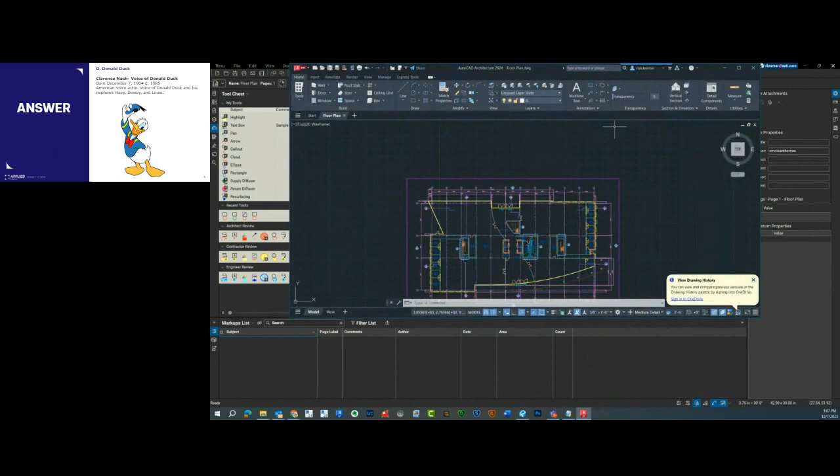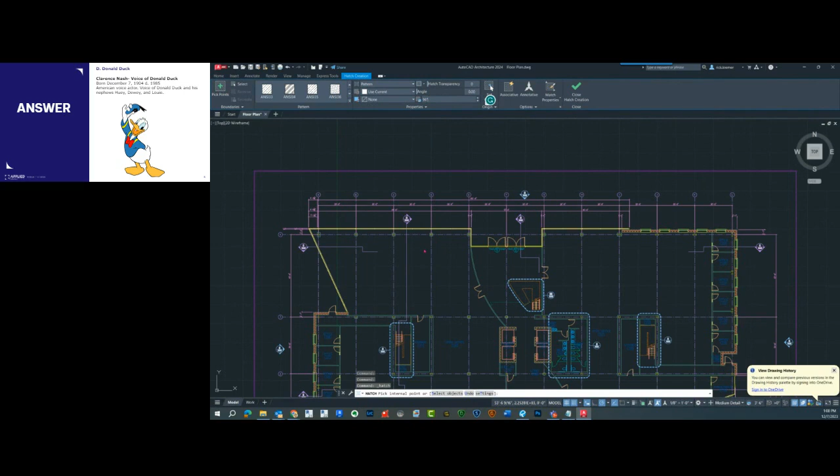To start off with PAT files, let's go old school and open up AutoCAD. I had to brush off the dust off this software because I'm a Revit user as well as a Bluebeam user, but I came from AutoCAD, and in AutoCAD you have what's called hatch patterns. AutoCAD architecture ships with all these different types of hatch patterns, which you can install or set up here in this environment. So all I'd have to do to put in a hatch pattern is put it in right here, and it finds the information, and I'm done.

So over here is this hatch pattern, wrong scale, but you get the idea. Users were requesting Bluebeam be able to bring in hatch patterns into Bluebeam.

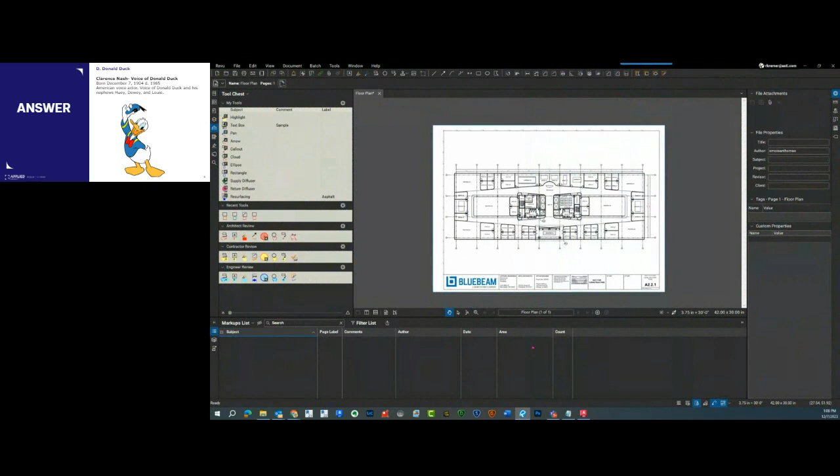So what I want to do is show you 3 different methods. You guys are going to love this. 3 different methods on bringing in and creating hatch patterns in Bluebeam Revu.

You might know that you can create hatch patterns here in Bluebeam. If you've never seen that, all you have to do is open up a closed shape, like a rectangle, circle, or polygon. I'm just going to do a quick test off in the top area, and when you place this object, up in the top properties bar you have an area called hatch.

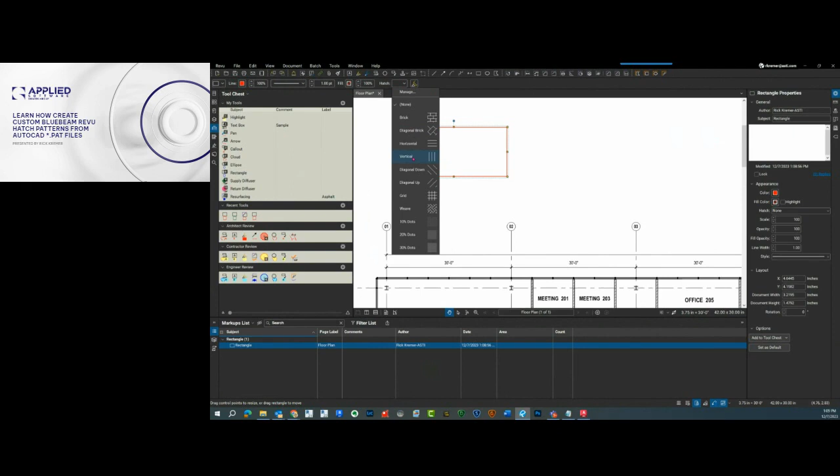Good, bad, or indifferent, the hatch patterns are there for your use. I personally don't like them because I think they clutter the drawing too much. I don't know what you all think. But if I wanted to fill this with a pattern, built into Bluebeam are these hatch patterns, which are really neat. So if I wanted to give this a brick pattern, all I have to do is select it, and voila, I get a brick pattern.

You'll tend to find that the patterns that come in here are too large of a scale. In that case, all I have to do is open up the properties toolbar on the right-hand side. I always like having my properties on the right, I don't know about you all. There's a reason for it, and if you're interested I'll tell you why. I always move my properties to the right-hand side.

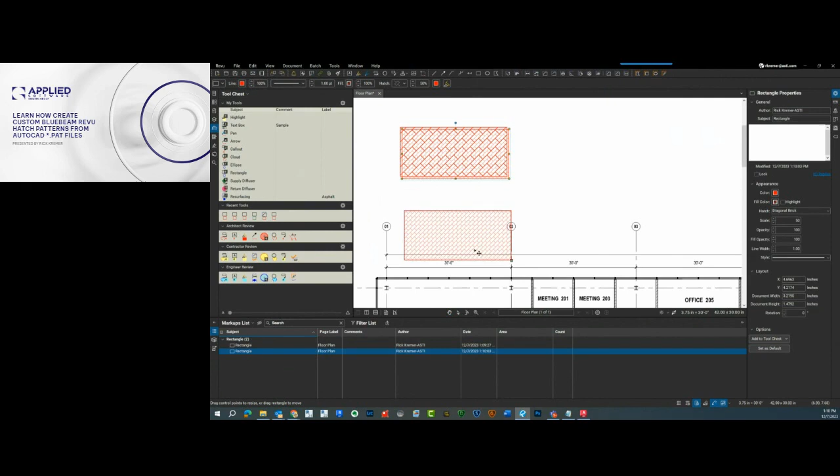If I wanted to change the scale of this, all I have to do is open up the properties panel on the right-hand side and change the scale. By changing the scale, I can make it smaller so it fits in this area. So here's the original, and here is the scaled down version.

So how do we start to go through and place these hatch boundaries? Well, easy. First, we can draw it with a polyline, or one of my favorite ways is using dynamic fill. For those of you who don't know about dynamic fill, this is going to be a great lesson. If you have an area like this open office area, and we wanted to place an area calculation to get the area calculation and also put a hatch pattern, I could draw it manually by going over to Tools, Measure, Area, and click and click and click, but that's old school.

If you have the new Bluebeam subscription 21 and you're on the complete edition, or if you're on Bluebeam Revu 20 and using the extreme edition, you have something called dynamic fill. Oh, are you ready for this? Dynamic fill, I hope you're sitting down. I'm going to use the shortcut key, the letter J, for dynamic fill.

It comes up with this floating dialog box, which allows us to use a paint bucket to really kind of paint by numbers in an area. What it'll do is go through and fill an area with a temporary hold, let's say a goo of space. You can also define boundaries. So for example, when I start to fill in this area, it's going to fill in over here because there's no lines for the doors.

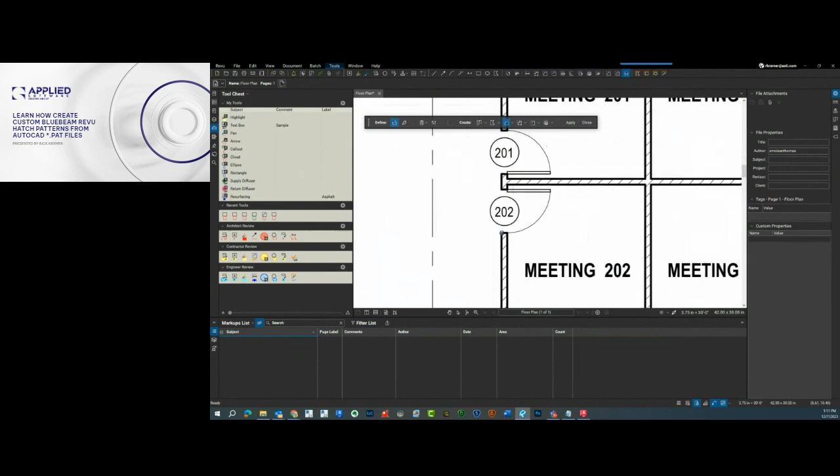So I'm going to start by putting a boundary, and this prevents the goo, in this case the Bluebeam goo, from going into these meeting rooms. I overshot it, and that's fine because this is just a temporary threshold. Think of it like you're pouring paint or concrete, you need a boundary for that concrete to rest against. What we're going to do is pour paint, and it even looks like a paint bucket.

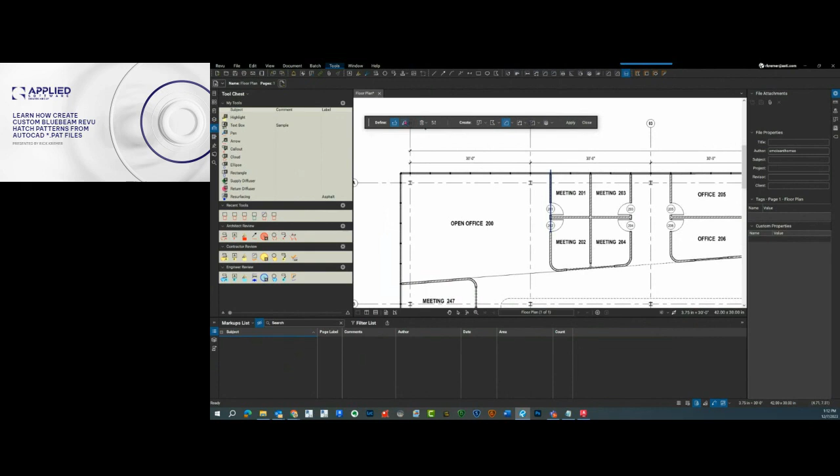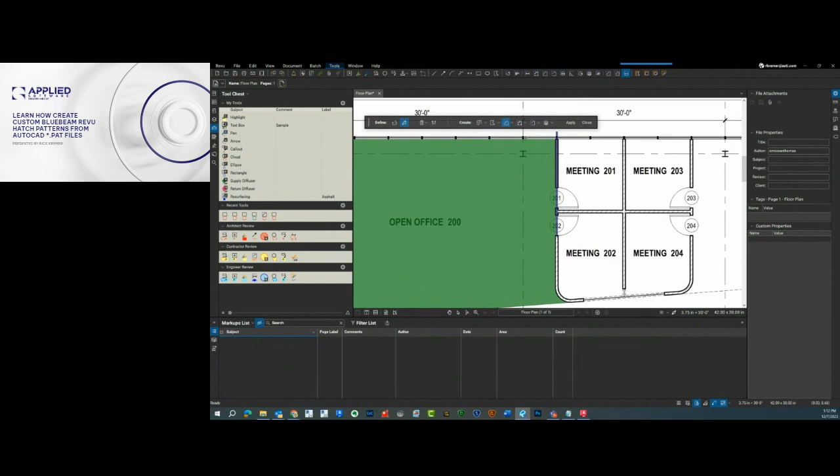I'm going to simply left click and hold - this is the adult paint by numbers. Boom, and I'm done. Over here, I'll fill in this area, and then I can create different things, like spaces and polylines. In this case, I'm just going to create a default area, selecting default, and click apply and close. So there it is, and now I have the space over here that's 944 square feet.

But let's say I want to fill it in with a hatch pattern. Simply select it, and I can go to the top properties toolbar or the properties panel on the right hand side, my favorite, and apply a hatch boundary. So I'll come over here and apply this weave, and there it is. I can try to change the scale of that, and I'm off to the races. I can even change the color

and make it blue - fill color blue. So how do I start to go through here and make this unique? Let's delete that and start over.

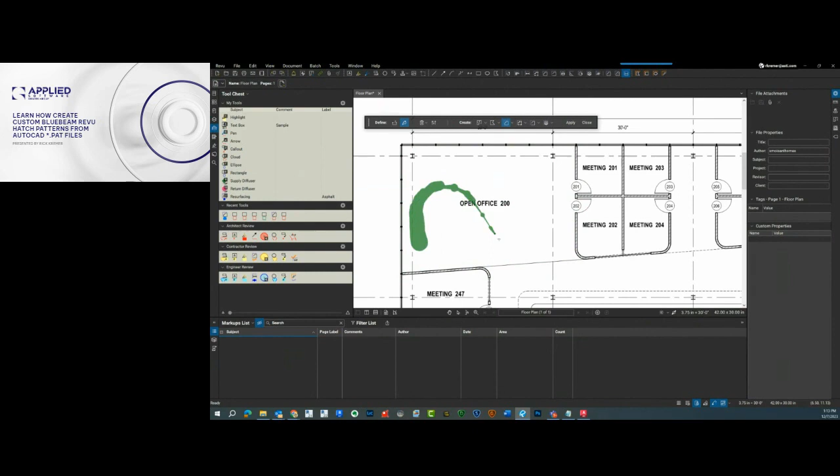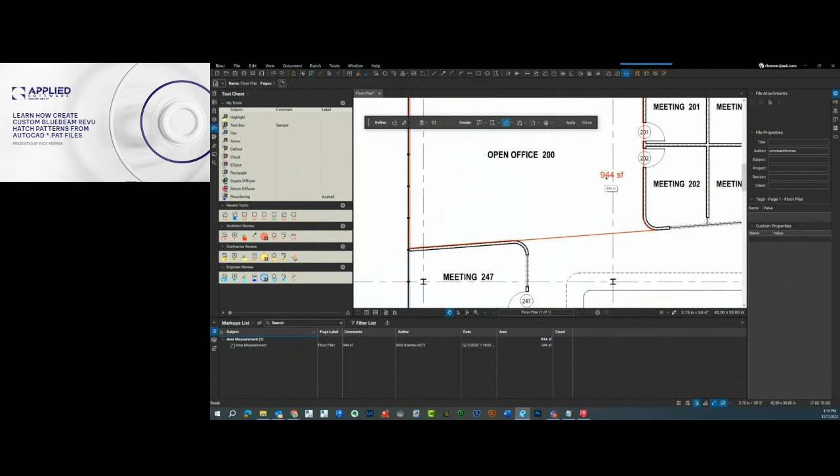If I wanted to create a new hatch boundary, I have the ability built into Bluebeam Revu, an easy way of creating a hatch boundary. First, let's start again by filling in this space with a generic area. This time I'm not going to put a boundary, and you'll see what happens - it fills in this right here. So I'll go back and cut it off with a boundary. In the next few steps, I'm going to show you how to create a hatch pattern from scratch, and I've got other ways up my sleeve as well. All right, so I'm going to move this over here and close.

When creating a hatch pattern, again, we have these built-in hatch patterns under hatch, but I'm going to show you where we're going to start to create some new ones. To do that, I'm going to go over here to manage, and this is where Bluebeam stores all of its hatch patterns. The PAT file I referred to at the very beginning of the webinar refers to an AutoCAD PAT file, and I'll show you where we're going to get those. But let's start off by first looking at the ones that are existing, then we're going to look at creating them, and then I'm going to show you how to use AutoCAD hatch patterns.

First, we need to create a pattern set. Out of the box is the standard set. Let's create a new set - that set is going to be our group of hatch patterns that we're either going to create from scratch or import from AutoCAD. So I'm going to click Add and give this a new set name. I'm going to call this Rick's Custom Patterns - let's call them Rick's Custom Hatches. And I'm going to go ahead and hit OK.

By the way, this is now a set, and over here is going to be a list of all the different patterns that I can create. I'm going to start by creating a new one over here by clicking the plus sign. Over here, this is the name, and we're going to have a list of all the different patterns that we're going to create. I'm just going to make up a name - I'm going to call this steel pattern, and give it my initials so I know it's mine in case there's another one out there. And when I do that and create one from scratch, I have a preview window of creating a new hatch pattern. Now, this is really, really fun and easy.

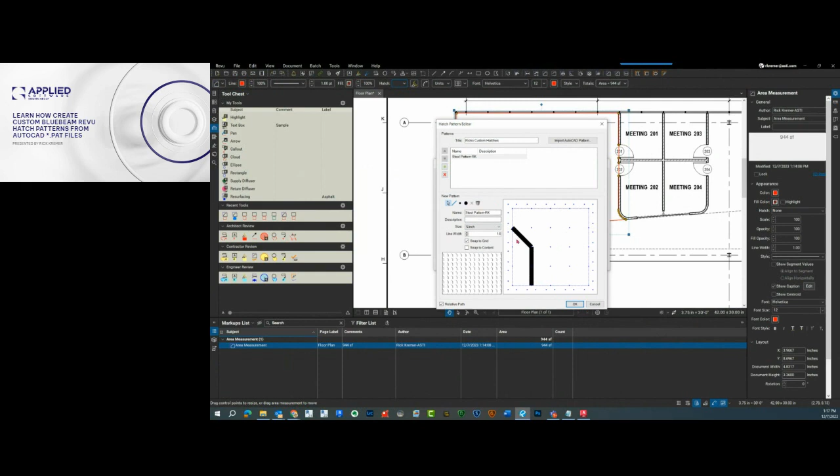So let's say this is perfect. You can see how simple this little line is, and now this is a steel pattern. I'm going to go ahead and see how this works in real time. I'll hit OK. And now I've created a set with just one new custom hatch pattern.

To apply that custom hatch pattern, all I have to do is select the area I just created, and either go to the top properties or, my favorite, over here on the right-hand side to the tool palette, and go over to hatch patterns. Here's my custom hatches. Notice the standard set is over here, and my custom hatches are now grouped down below. I'll go ahead and select that.

And there it is. If I want to change the scale of this, all I have to do is simply change the scale, which I typically do, and make it usually 50%. If I want to change the color, I simply come over here and change its color.

And that's the color of the outline. To change the color of the fill, I'll change it right over here. Now you might be wondering, how do I go ahead and start to create some other ones?

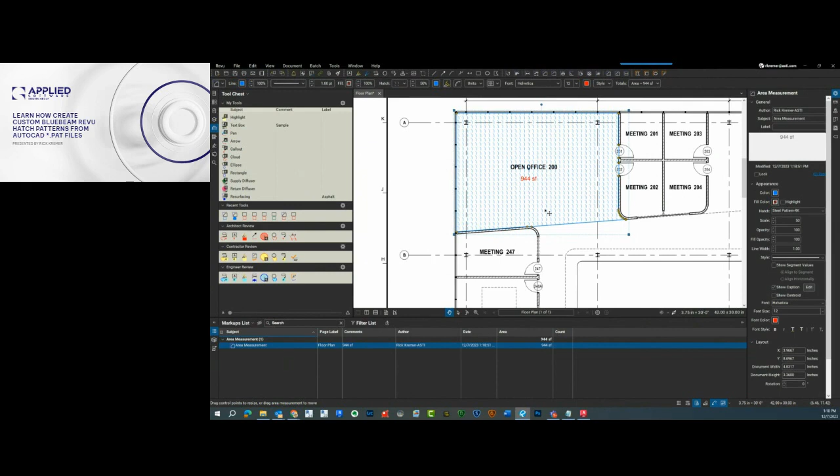Let's see how we can do that. Let's create another filled area. In this case, I'm going to create a filled area right here, again using dynamic fill. I love dynamic fill. And again, using a temporary boundary, I'm simply going to click from here to here, and this creates this threshold.

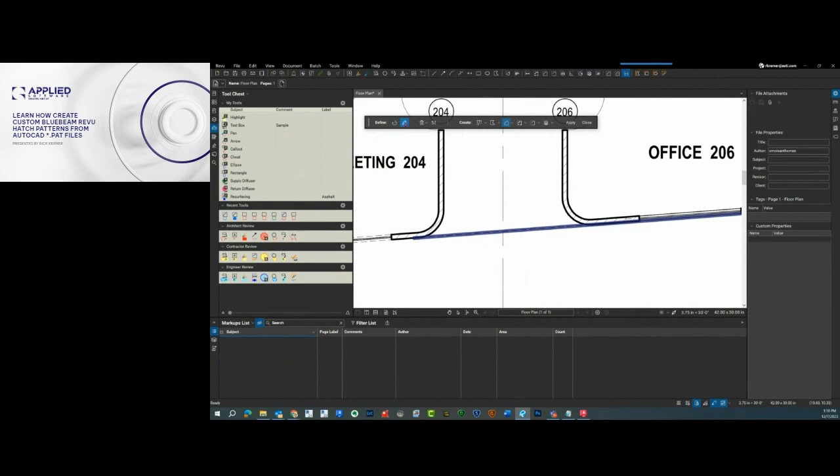You might be wondering, why did I do that? You notice those dashed lines - if I were to pour paint, they'll actually go right through those dashed lines. So I'll come over here and add some more thresholds from here to here, and from here to here. Again, overshooting isn't an issue because these are temporary and they'll just disappear when I'm done.

And I'll go ahead and add my temporary fill.

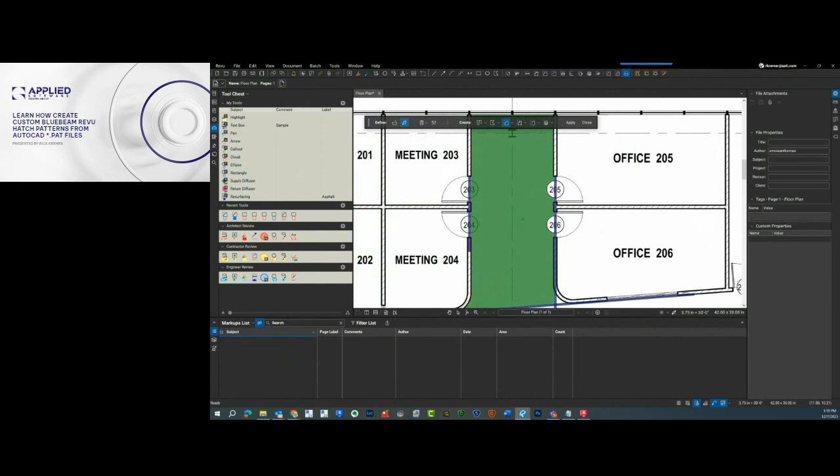Did you know you could paint by numbers over here, Misty, using dynamic fill? I did not know, but that's pretty awesome. Isn't it? I gotta say, yeah, it's fun for the whole family. So if you're ever wondering what to do on a weekend with the kids, just go ahead, load up Bluebeam and paint by numbers using dynamic fill.

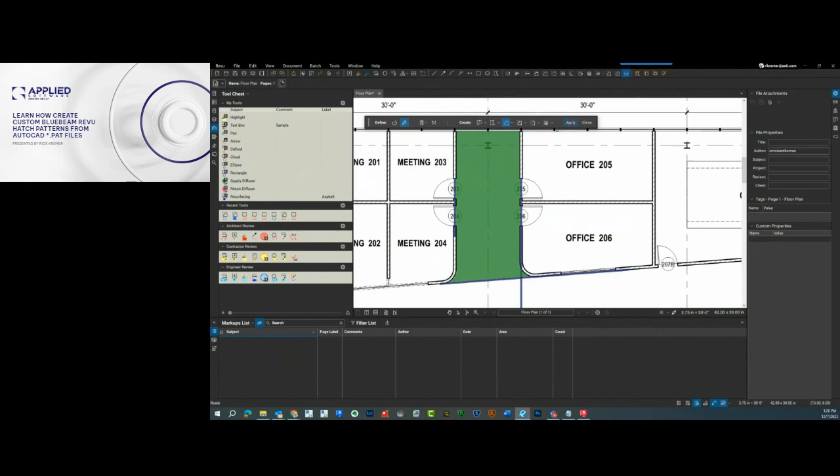All right, over here, I'm going to go ahead and apply and close. So on this one over here, I'm going to apply a new hatch. Again, go to manage - I'm going to open up my set.

And over here, click modify, not add, but modify. So when I do that, I'm going to add another drawing. In this case, instead of creating one from scratch, let's see what kind of other patterns we can create.

I'm going to create another custom one, and let's give it square boxes - square tiny boxes. I don't know what they are, but whatever they are, they're square tiny boxes. In this case, I'll come over here and simply draw something from here to here to here to here. And there, we can see that we got these tiny little boxes, right? I mean, how easy is that?

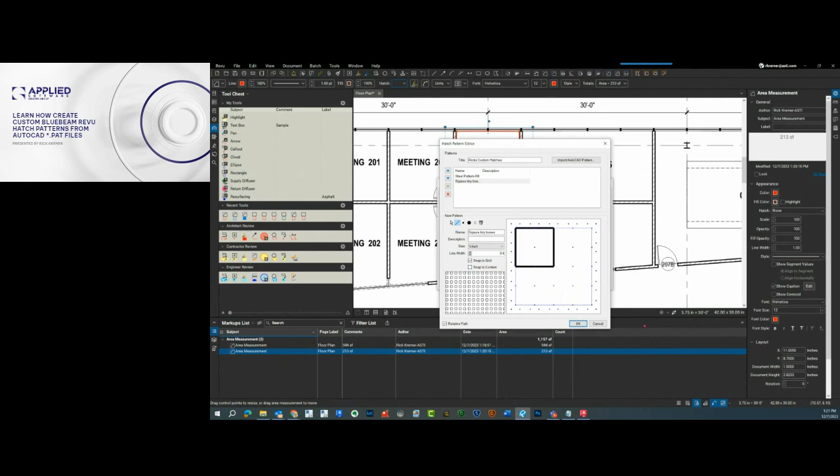If you've ever tried creating a hatch pattern in AutoCAD using Hatch 22 add-in or any of the other ones, including some from PyRevit, you don't get immediate results. You don't really see them, but here you really do. We can even adjust the line width to make it thinner, which is usually something I like to do. I'll go ahead and hit OK.

Again, add that hatch boundary here, and over here are tiny new boxes. What's interesting is in this drop-down menu, you don't see the different sets versus if we do the same exercise on the right-hand side going to hatch, we can see the standard and then my custom hatches.

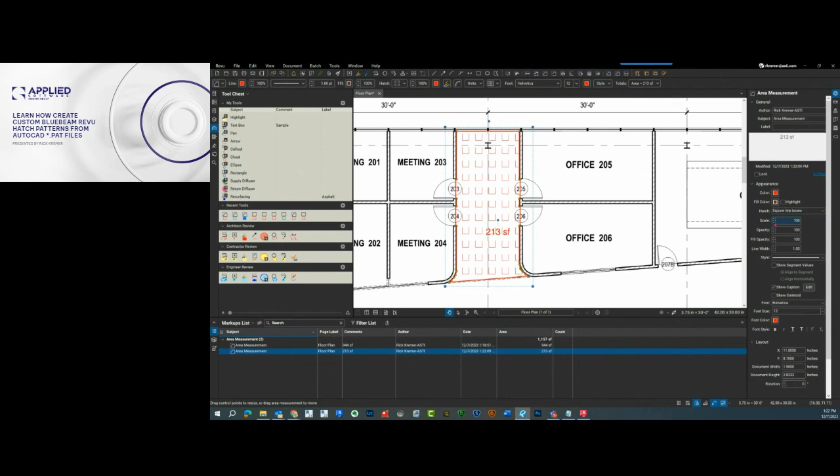Again, change the scale and bring it down. Easy peasy. Let me go ahead and minimize this. I'm not talking about tool sets today.

All right, how do we do AutoCAD hatch patterns? Remember, we had all of these AutoCAD hatch patterns. If you have AutoCAD or AutoCAD Architecture installed on your computer, guess what? You have these hatch patterns for free. What we're going to do is first locate them.

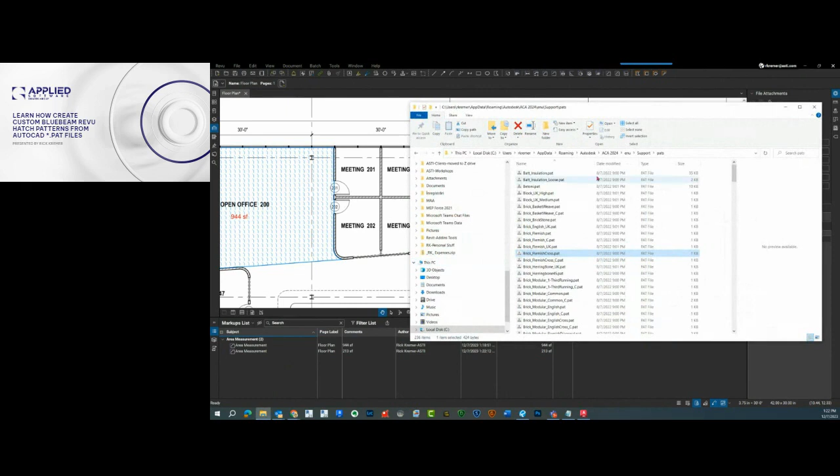I've already done that for you, and I have a couple of slides afterwards with resources so you can see where these are. I have AutoCAD Architecture 2024 installed on my computer, and I have, in this case, 236 free hatch patterns included. They're right here under App Data, Roaming, Autodesk, ACA 2024. If you have earlier versions of AutoCAD or AutoCAD Architecture, just look for that year, and you should find it under ENU, Support, and then PATs.

These are the PAT files. If we take a look at what exactly is a PAT file, we can open it up with Notepad, and that is what that hatch pattern is. It's actually something that can be created manually.

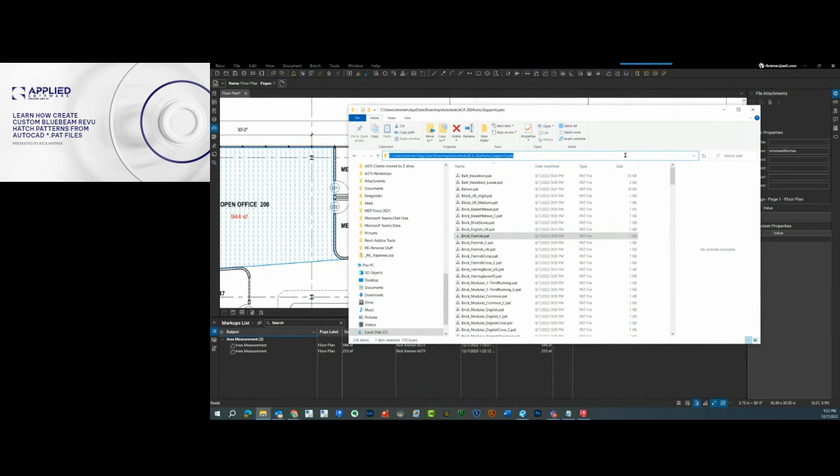No one would ever do this, maybe way back when, but this gives all the information for that line to start at a certain distance and go a certain length and a certain angle. But we're going to do that automatically. So what I'm going to do is just copy where this location is to my clipboard, and I'll show how we're going to create these hatch patterns from scratch.

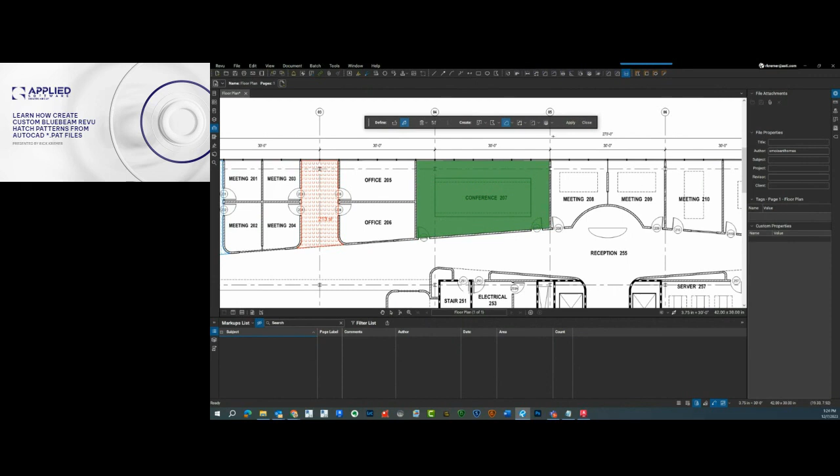Let's add another one over here. I'm going to add another dynamic fill pattern right here. As you can see, I love dynamic fill, it is just so easy to use. I'll go ahead and apply and close, select it, then go over to my hatch patterns, go to manage, select this, click modify, and we're going to add another one.

But this time, instead of adding one from scratch, we're going to import the AutoCAD hatch pattern. When I click here, I have to find where that is. Remember my earlier step, I went through and copied to clipboard where that location was. Now over here in file name, Control V and hit open. It takes me right to where these hatch patterns are. If I want to use one of these, just simply click on it.

Now, unfortunately, you can only click on one at a time. I wish we could add them all at once, but you can't. I'll add that hatch pattern, and here it is. Take a look at that, that is really, really nice.

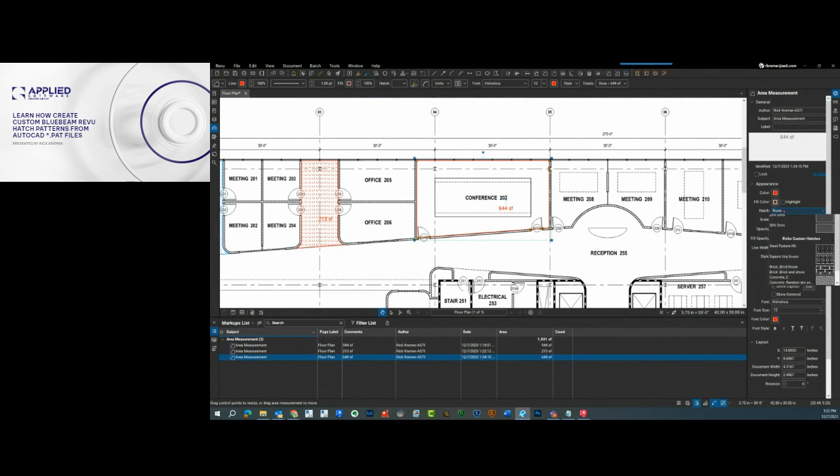If I want to add another one, just import AutoCAD hatch pattern and find something else. I'll go ahead and put in concrete. You can see this does it pretty darn quickly. I'll go ahead and hit OK, and now when I select it, I go to my hatch patterns. Here are my custom hatch patterns, and you can see I easily just added these two.

To change it, just simply click on it. Done. So that's how easy it is to bring in an AutoCAD hatch pattern. If we wanted to switch this to a different hatch pattern, no problem, just switch it up right here by changing the hatch pattern to concrete. Again, you can see this is really, really too small, so we can start to change the scale of this. Sometimes you have to scale it up, sometimes you scale it down.

So where do we get hatch patterns if you don't own Autodesk products? If you don't have AutoCAD or AutoCAD Architecture, well, I'm glad you asked. I'm going to show you where you can download free hatch patterns. Now, we're not endorsing this site, you can find them online. I just happen to find something that really works quite nicely, and I'm going to share this with you.

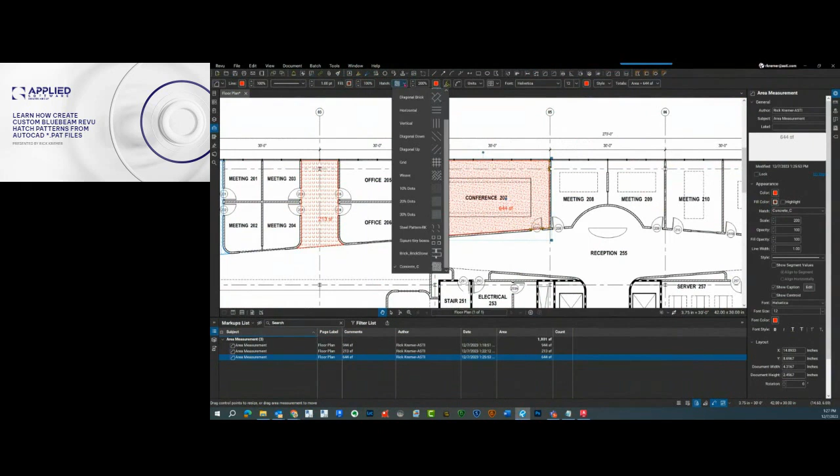Go into my hatch patterns, click Manage, Modify, and I'm going to import another AutoCAD hatch pattern from the Downloads folder. So I'm going to Control V, paste it right here, and there's that hatch pattern that I just downloaded.

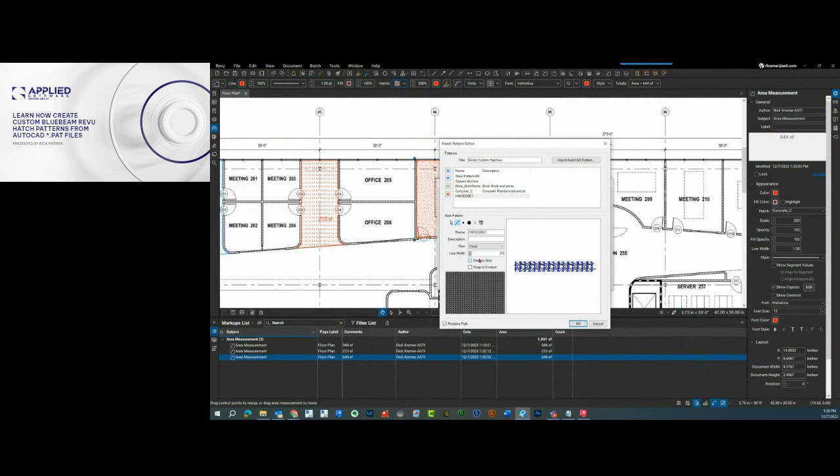There it is. This might not look good. I might change the scale of this. I'll go ahead and hit OK. Let's see what it does.

Over here, now just switch it to that new hatch pattern. And there it is. Ta-da!

You can see hatch patterns can now be used in a variety of different ways. So when you start doing area calculations, you can differentiate your different types of areas with different hatch patterns. So you can start to calculate your square footages visually, getting that information, and also in the markups list.

Now, I didn't go through here and show you all of that - that's another lesson on showing you how to use different hatch patterns and different subjects, so you can start to go through and customize this to, let's say, CPT1.

And this one here is going to be SS1, and this is WD1. Just that simple, now I can start to use different categories. Again, I would save this over here to my tool sets.

So where do we get all of this fun information? Well, what I'm going to do is hand it back over to Misty to see if there's any questions and take a look at those slides. You'll see the information and resources at your disposal on where to get these hatch patterns and where to get support.

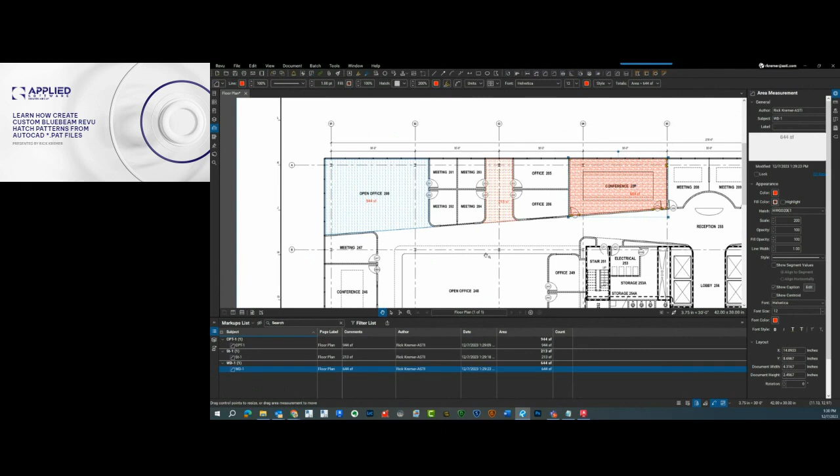In the studio, as of right now we don't have any questions, but as we take a short little question break, I guess that's what we'd call it. I think we're going with a question break because I don't have a dad joke prepared. Oh man, I should have.

Okay, this is terrible, but I follow this TikTok page that has all of these dad jokes. Last time we had a webinar I was like, oh man, I need to get some of these and just play them on a Bluebeam webinar. Whether or not you guys as an audience would like it or not, I would have a lot of fun with it. So, I know.

All right, I got one for you. I might have used it already - I probably have. But this is for those dad jokes out there, or mom jokes, that are really bad. What has 4 wheels and flies? 4 wheels and flies.

Now I'll give you a little bit of context. Wait a minute, before you answer, let me give you a little backstory to this.

When my kids were little, we'd fly on the plane and they'd go to the pilot and say, hey, I got a joke for you. They're little, right? So they'd ask the pilot, what has 4 wheels and flies? And what do you think the pilot would say? He'd say the plane, right? A plane. And my kids would be like, no. You know what it is? A garbage truck. It has flies. Bzz. 4-wheel. Oh my goodness, that's a good one.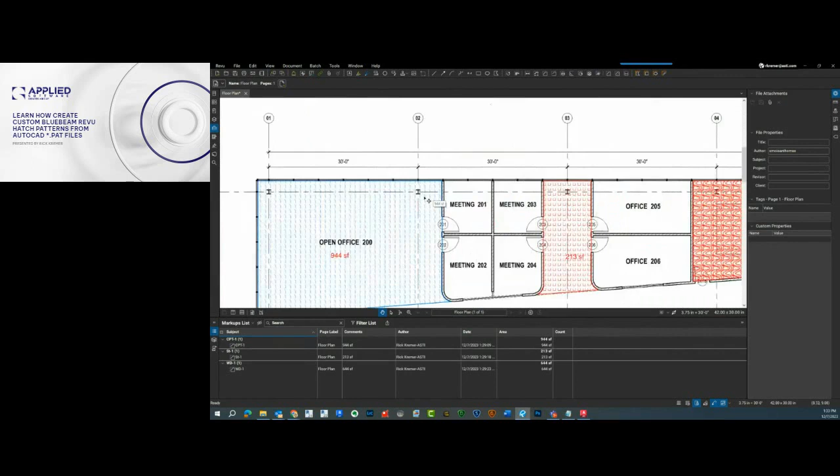All right, and we have another question. Can an image, JPEG or otherwise, be used as a hatch, or does a hatch need to be in PAT format? Yeah, it has to be a PAT format. I wish there was a way, it would be very cool if I could have like a little funny face of Donald Duck inserted instead, but it has to be some type of vector information.

Now I did notice, by the way, in the free hatch patterns, they actually have one that has letters in it. I honestly don't know how they did that one, but it's in there. Maybe look at the hatch pattern generator and see if there's a way you can put an image in there, but I don't know.

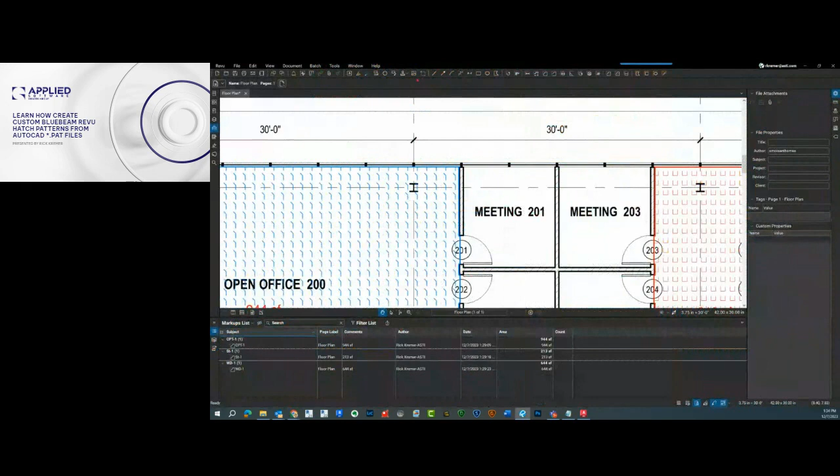Typically these are all lines. So again, when we're in Revu and taking a look at creating these hatch patterns, we go to manage, modify, importing a PAT file. Look online to see what you can find as a PAT file. But when we create a new one, I'm going to call this Ziggy, these are the options that we have.

I can draw a line, I can do a dot, and I can delete it. The nice thing with this is that you see immediately what this is going to look like. And if you go through and realize you wanted to change something, you can simply click on this line, click on it again, and now it changes so you can start to make those adjustments.

This is a really simple little tool, but incredibly powerful, especially when you start to create simple patterns like this. I mean, look at that. Go here and just make it smaller. Pretty neat, but no way to insert an image that I'm aware of.

If anyone on the call knows or has seen that, please feel free to chime in, but I've yet to see that. You can insert images in Bluebeam, but not as a repeatable hatch pattern that I'm aware of.

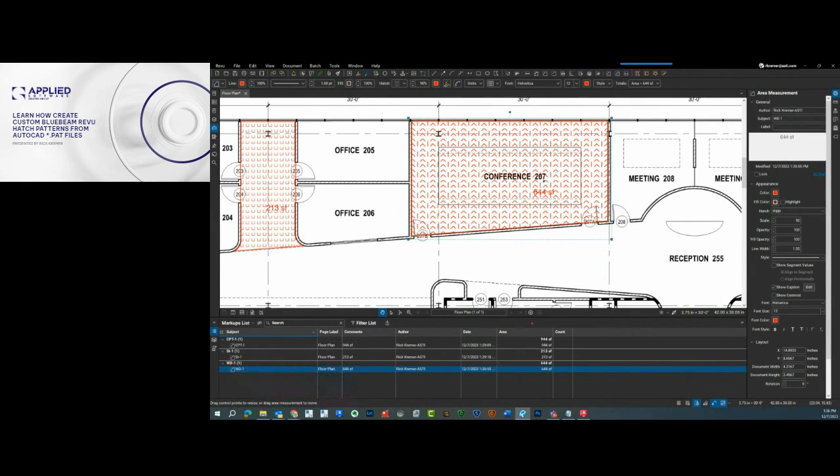If you need technical support, we're here for you. If you are a customer of Applied Software GRAITEC Group and need technical support on your Autodesk and/or Bluebeam, go to our website, asti.com, go to training and support, and simply click get support. This will bring you to a page where you can call us and talk to one of our support specialists, or fill out the form. My recommendation is to fill out the form. You'll get faster service that way, and here you can upload your problematic file.

If you need technical support directly from Bluebeam, you can reach out to them at support.bluebeam.com. You can get support help 24/7 from Bluebeam directly, and their agents are standing by, almost as enthusiastic as me.

Again, if you have any questions, go to asti.com/support. And if you have any questions, whether or not you are a Bluebeam user, subscriber, our customer, or just seeing this for the first time, email me at bluebeam@asti.com, and we'll be happy to answer any questions you may have. Those will show up in the slides right after this.

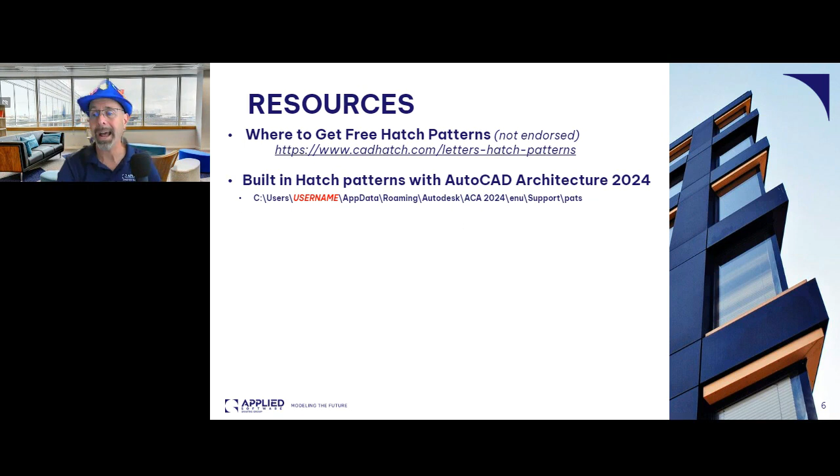Thank you. Just real quick, I'm pushing that slide over here. Misty, go ahead and push that resource slide. Awesome - so the free hatch patterns you're seeing right now are at cadhatch.com. Built-in hatch patterns, there's the list of where you can find it on your computer. This is where it typically is on most PC-based computers - this is not Mac, this is a PC-based support path.

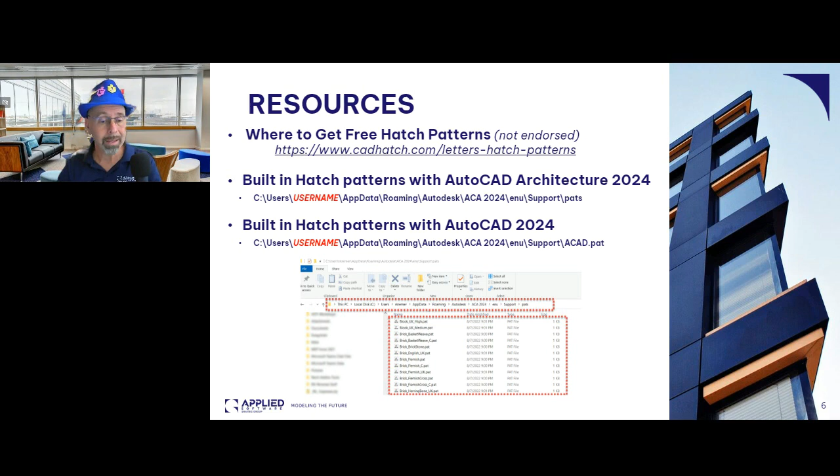If you need technical support for our ASTI customers, thank you for being a valued customer - you can simply reach out to us at asti.com/support. Or if you want support directly from Bluebeam, nights or weekends, go to support.bluebeam.com or email us at bluebeam@asti.com. It's been my pleasure seeing you all virtually online.